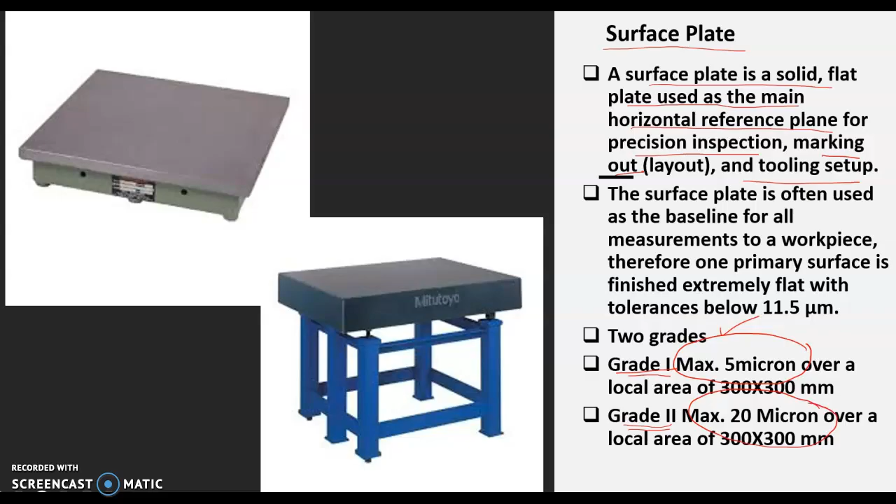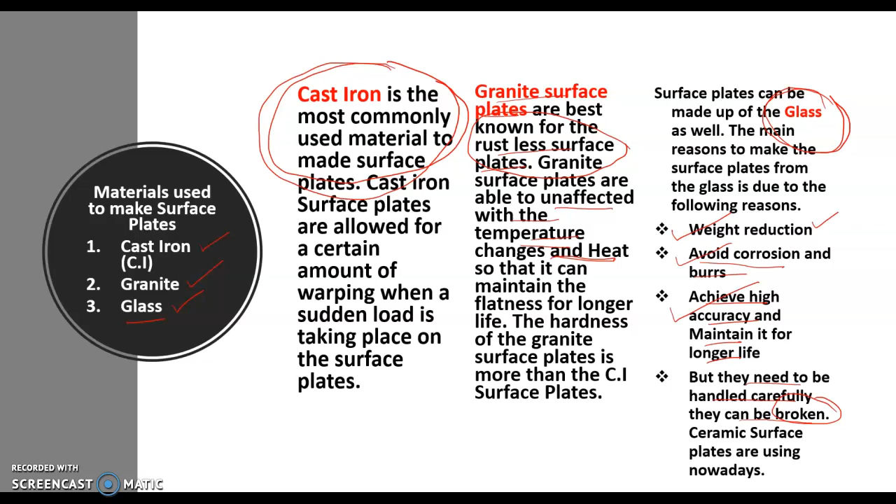The material used for making surface plates is either cast iron, granite or glass. First, we will consider cast iron. Cast iron is the most commonly used material to make surface plates, but these are less precise. On the other hand, granite surface plates are best known as rustless plates, and these are also unaffected by temperature and heat. Finally, the glass-made surface plates. Their advantages are weight reduction, avoiding corrosion and burrs, and achieving high accuracy and maintaining it for a longer life. But they need to be handled carefully.

Next is a height gauge, otherwise called a vernier height gauge. It's a measuring device used for determining the height of objects and for marking of items to be worked on. For that purpose, we are using a measuring and scribing stylus. This acts as a jaw while we are measuring the height, and it has a sharp pointer at the front, which is used as a scriber for marking purposes.

The height gauge is used along with a surface plate. It will be placed above the surface plate like this, so that the surface plate provides a horizontal datum, and the vernier height gauge provides a vertical datum.

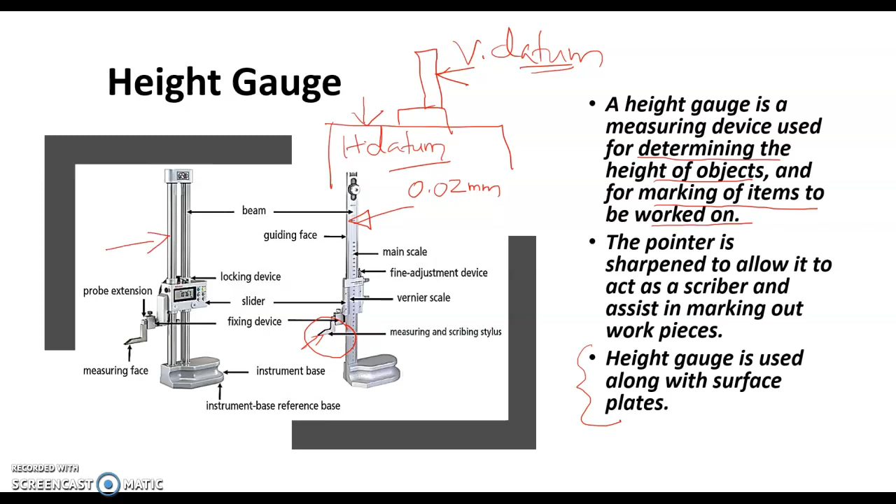The next feature of the vernier height gauge is how these are most commonly available. This is a conventional one, the scale type, available with a least count of 0.02 mm, and this picture shows a digital vernier height gauge, whose least count may be up to 0.001 millimeter, that is up to 1 micrometer accuracy.

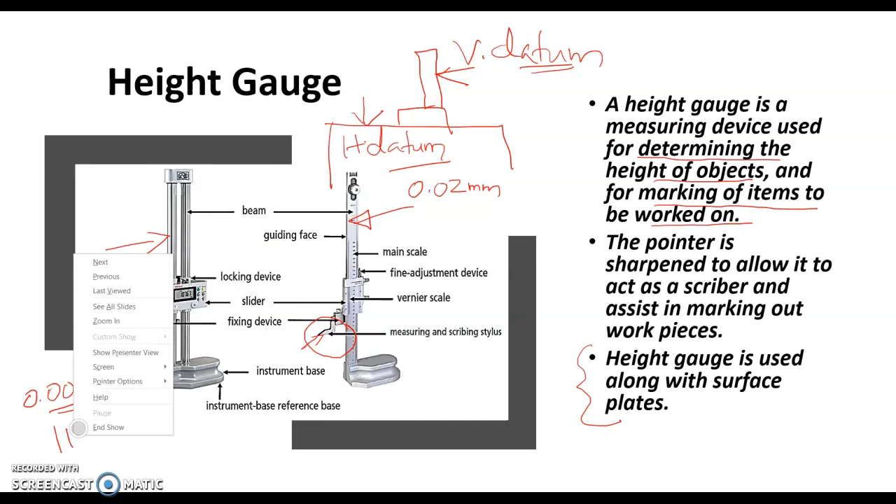Another instrument is a vernier caliper. A vernier caliper is a precision measuring tool which can be used for three types of measurements. One is outside measurement. External features like diameter, width of a step, length, etc. can be measured using these external jaws.

The second is internal measurement, performed using the internal jaws. These internal jaws can be used for measuring the diameter of a hole or width of a slot, etc. Finally, we have another feature, depth measuring. Depth measuring is performed using a depth measuring blade, which can be used for measuring the depth of a blind hole or depth of a slot, etc.

The least count of the vernier caliper: in the metric system, we can have two types, either a least count of 0.05 millimeter or 0.02 millimeter, and for the inch type it ranges up to 0.001 inches.

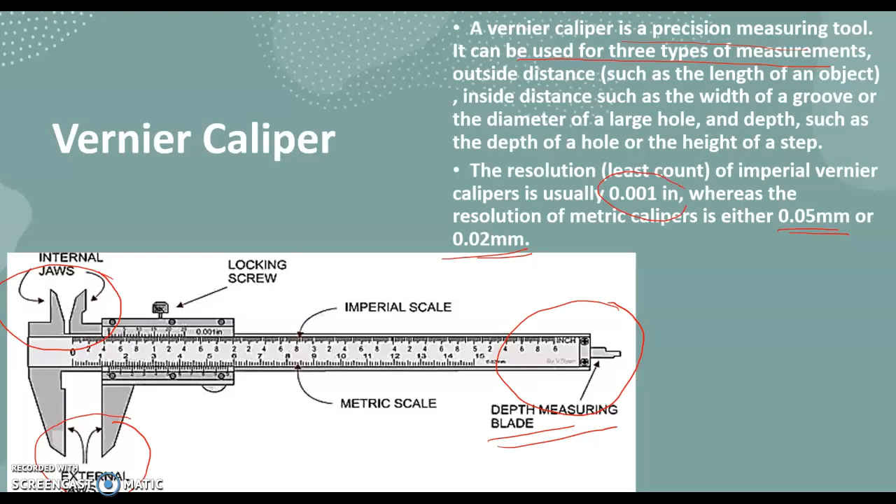Finally, we are considering the instruments known as dial indicators, otherwise known as dial gauges, because they have a dial. These are used for initial setup or calibration of a machine, for centering of workpieces in a lathe machine in a four-jaw chuck, and in runout checks before a new disc is fitted into automotive disc brakes. These indicators are available in two types: plunger type and lever type.

The first picture shows a plunger type dial indicator, in which we have a plunger. This one is the plunger. This plunger can move up and down inside this sleeve. The movement of this plunger is magnified and converted into the movement of a needle over the dial. So the needle may move clockwise or counterclockwise based on the movement of the plunger.

In the lever type, instead of a plunger, we are using a lever which has an oscillatory movement. Based on the oscillatory movement, we will have a movement of the needle in either clockwise or counterclockwise direction.